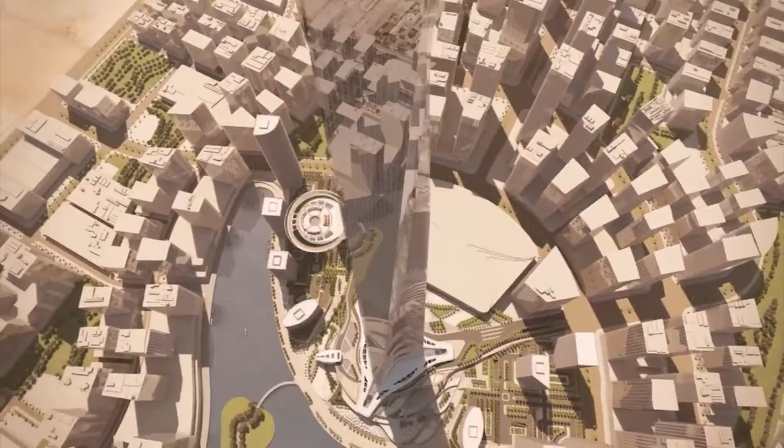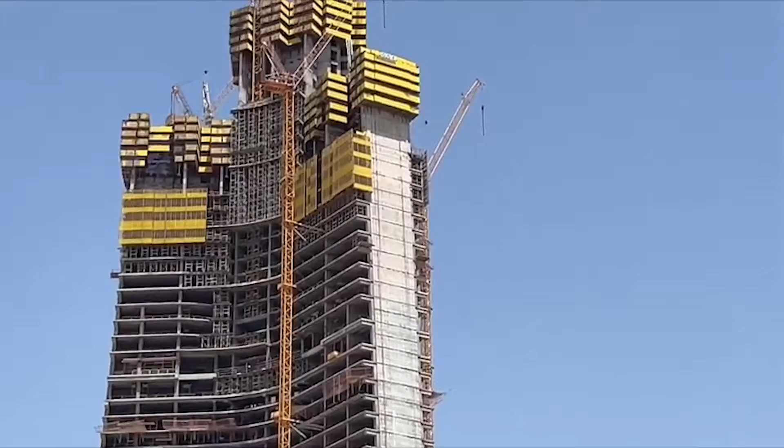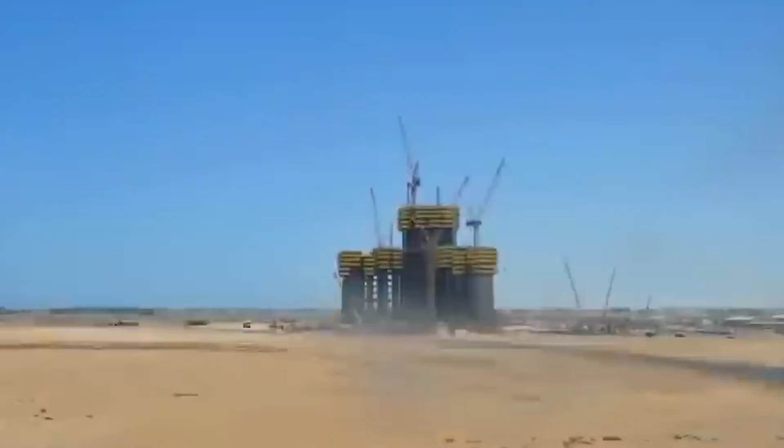Saudi Arabia's Jeddah Tower was proposed as the world's tallest structure over 10 years ago, but now it's practically a ghost town. What could have stalled such an ambitious project? Well, for starters, it takes more than a world-class architectural firm to build structures of this kind. But true to their word, the kingdom has resumed plans to transform this uncompleted building into what it's meant to be, a modern engineering marvel so tall it pierces the clouds and marks its territory on Saudi Arabia's skyline. Construction is set to resume on this historic site once again, and we are about to find out the latest updates.

But before we get into that, a little background on the Jeddah Tower. The story of the Jeddah Tower began in the mid-2000s.

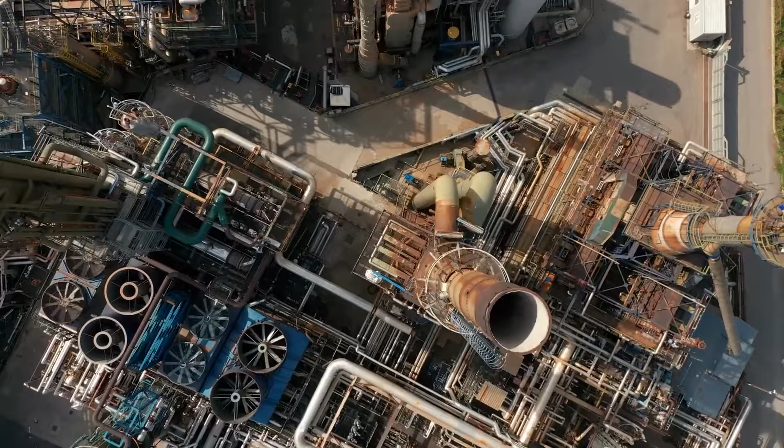This was a time when the economy of Middle Eastern countries like Saudi Arabia was booming. Oil prices were at an all-time high, and since Saudi Arabia is one of the largest producers and exporters of oil in the world, its GDP was getting really good. So they decided it was time to diversify their economy and began investing the money they made from oil into grand architectural projects. The Jeddah Tower, originally known as Kingdom Tower, was envisioned as the centerpiece of this new economic era, not just for Jeddah, but for the entire kingdom.

The idea was first proposed by Prince Al-Walid bin Talal, chairman of Kingdom Holding Company, and designed by American architect Adrian Smith, who also designed the Burj Khalifa in Dubai. The prince wanted a structure that would announce Jeddah's global status as a business, commercial, educational, medical, and entertainment hub.

So they aimed for something that has never been done: the construction of a building that will be over 3,280 feet, or 1,000 meters long. For context, Dubai's Burj Khalifa is 2,700 feet, or 828 meters. So Jeddah could break that record if completed.

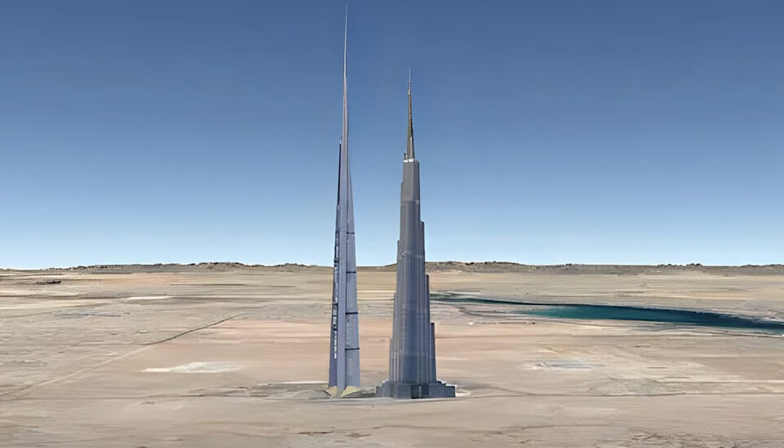The Jeddah project was officially announced in 2011, with construction beginning in 2013. But despite a promising start, plans were halted in 2018 when its primary contractor, the Bin Laden Group, was removed following the arrest of its president Bakr bin Laden as part of an anti-corruption purge initiated by Saudi Crown Prince Mohammed bin Salman. Then COVID came, and all plans were put on hold.

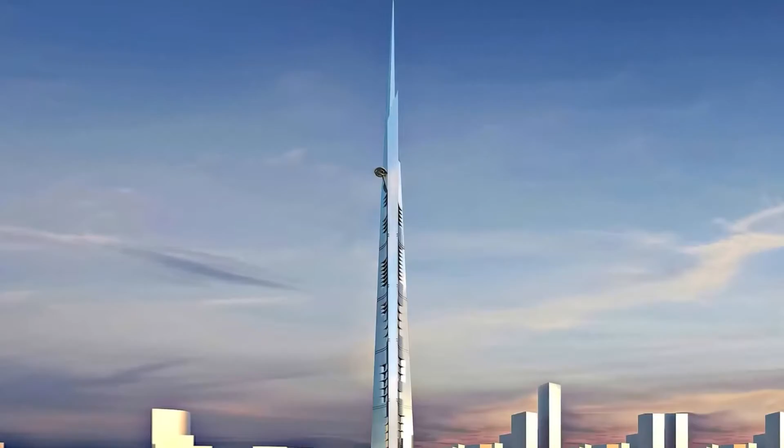The last thing we heard about Jeddah Tower was that the foundation had been laid and that a quarter of the original 1,000 meters had been completed. So let's see what's new.

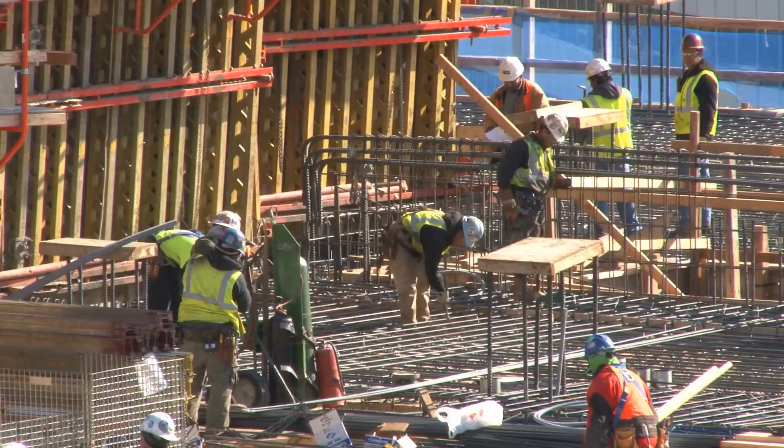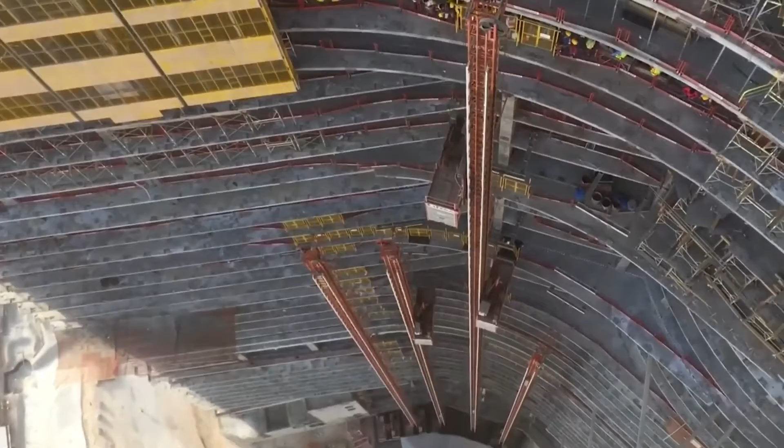Plans to restart the construction of the Jeddah Tower first hit the news in autumn 2023. With this, the Jeddah Economic Company went on a fresh hiring spree to gather the required workforce. This time, they called 14 different contractors, both local and international, to bid for the contract to complete the record-breaking structure. Each contractor was given a 3-month window to prepare their bids, with an expectation to form joint ventures that blend local knowledge with international experience.

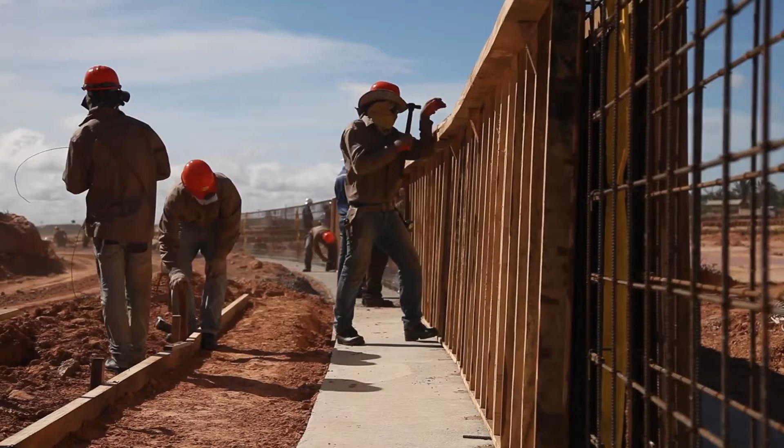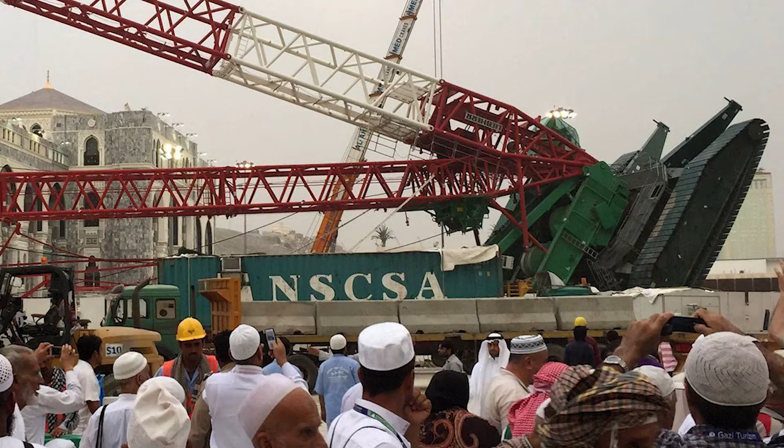Since then, the site has seen a new light, with contractors visiting to assess the task ahead. Although Saudi Bin Laden Group, the project's original contractor, has been replaced due to previous financial and operational challenges, the consulting team remains unchanged. The American company, Adrian Smith and Gordon Gill Architecture, will be in charge of the architectural vision, while Dar al-Handasa from Lebanon will provide the engineering expertise.

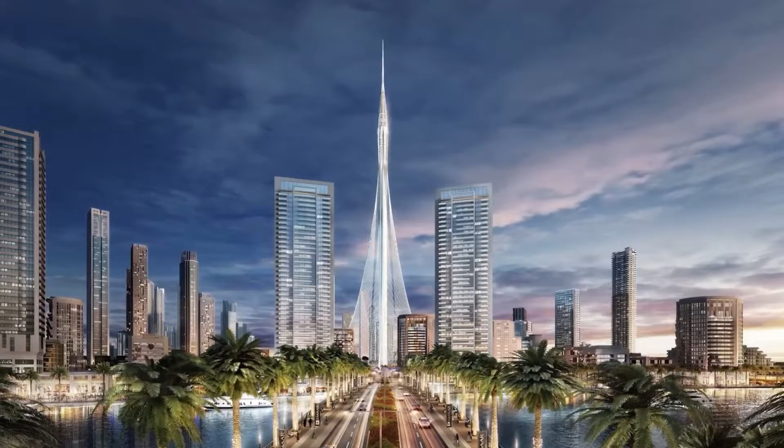Interestingly, Saudi Arabia is making no changes to the original plan for Jeddah Tower. The Jeddah Tower is designed to be much more than just the world's tallest building. Its creation is part of a bigger plan, which is Saudi Arabia's 2030 vision, a plan that will reduce the kingdom's dependence on oil, diversify its economy, and develop public sectors like health, education, and infrastructure.

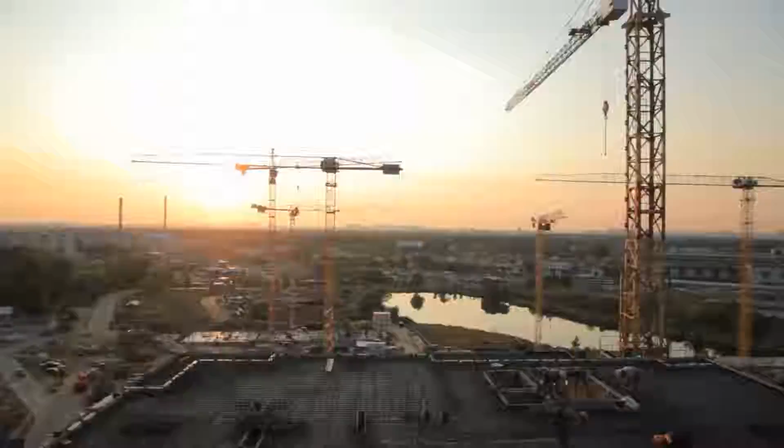Saudi Arabia is currently on the brink of a real estate bubble driven by a growing population and a limited housing supply. This situation is pushing demand and prices higher, and will also create the need for high-end luxury units like those planned for the Jeddah Tower.

The centerpiece of the development, Jeddah Tower, is primarily designed to accommodate a Four Seasons hotel, short rental apartments by Four Seasons, Class A office spaces, and luxury condominiums. It will also feature the world's highest observation deck.

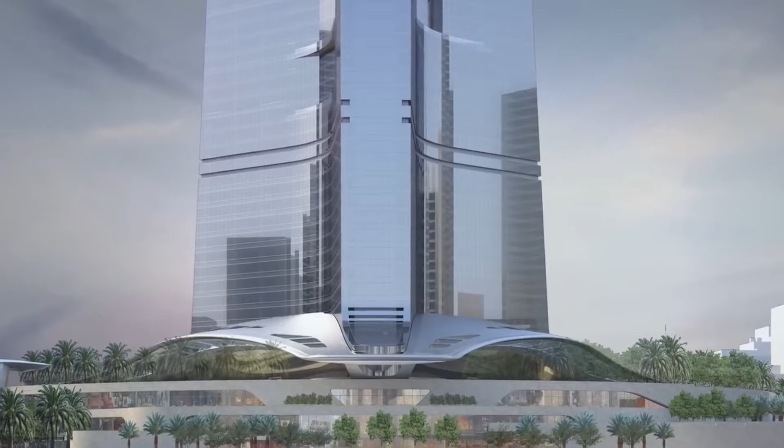Positioned on a nearly isolated plot within Jeddah Economic City, the location was chosen due to the unavailability of similarly sized land tracts nearer to Jeddah's current urban center. The area to the north is expected to be the future direction of urban expansion for the city.

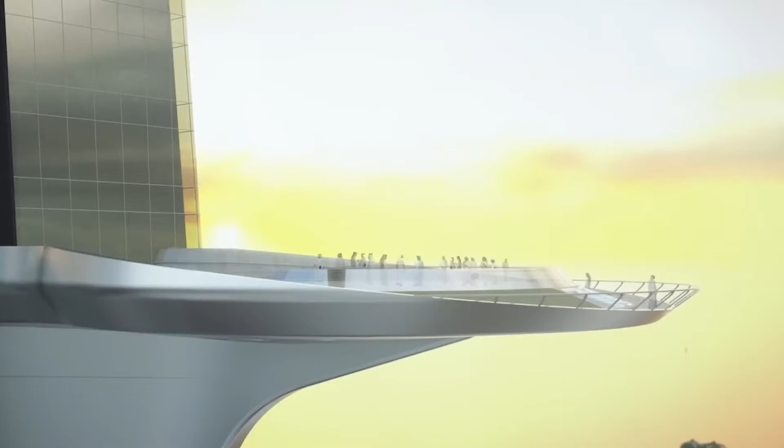Another reason for this project is tourism. With its record-breaking height, the tower is set to offer observation decks with unmatched views of the surrounding region, luxury accommodations, and world-class amenities, all of which are expected to draw visitors from around the globe.

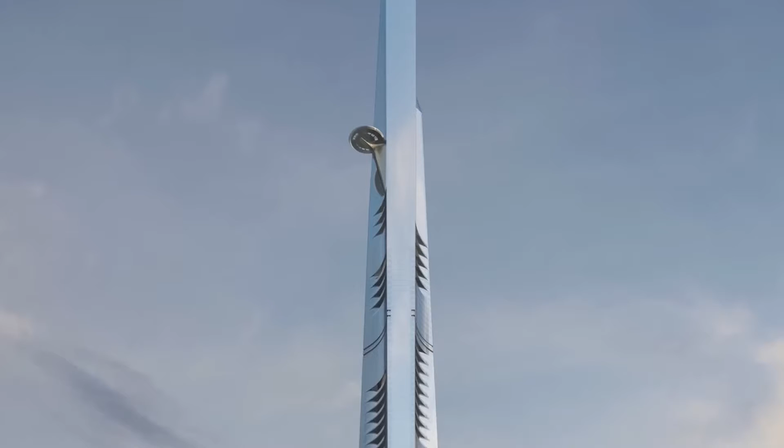Aside from these lofty visions, the Jeddah Tower is also meant to be a showcase of cutting-edge architectural and engineering techniques, something Saudi Arabia isn't famous for. The structure is inspired by the shape of a desert plant and the way the fronds sprout upward from the ground as a single form, then start separating from each other at the top, symbolizing new growth. Each of Jeddah Tower's 3 sides features a series of notches that create pockets of shadow that shield areas of the building from the sun and provide outdoor terraces with stunning views of Jeddah and the Red Sea.

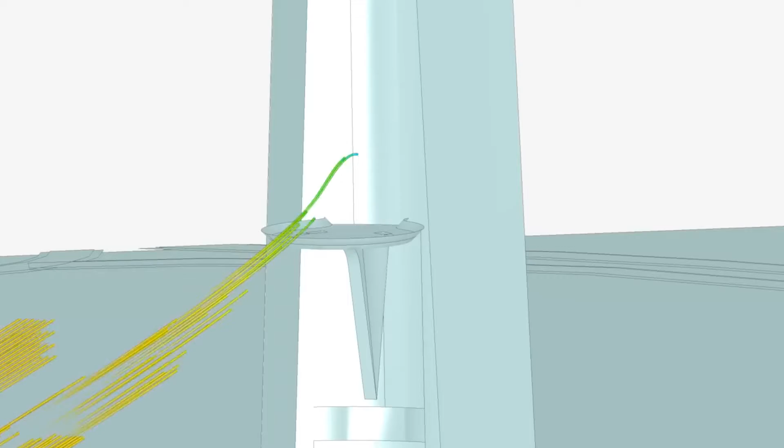Since the structure will be very tall, there's a need to reduce structural loading due to wind forces. Typically, when wind wraps around the leeward side of a building, filling the low-pressure area from both sides, it can form tornado-like vortices. These vortices, varying in pressure, direction, and velocity, can cause the building to sway from side to side. This is what inspired the sleek, streamlined form which tapers as it rises.

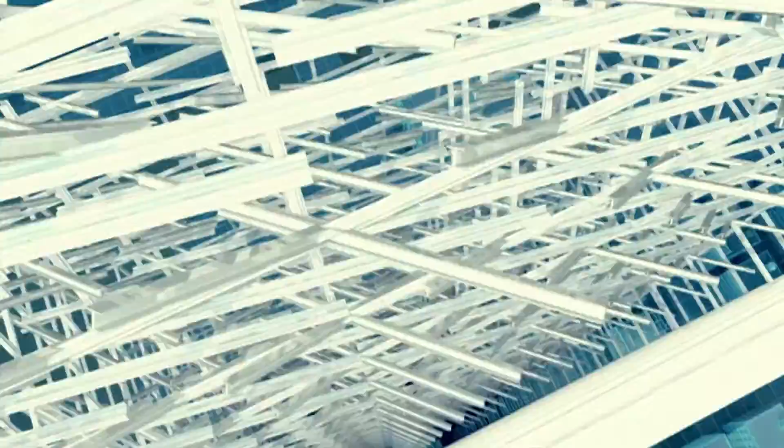The dynamic facade of the Jeddah Tower is designed to counteract this effect. It achieves an infinite timing differential in how air pressure is applied in any one direction. This innovative approach ensures that no large areas of extreme pressure or vacuum exist at any time, enhancing the building's stability. The tapering also gives the tower a unique, elegant profile against the skyline.

The walls are made with the buttressed core design. It's a structural system for high buildings consisting of a hexagonal core reinforced by 3 buttresses that form a Y shape. This configuration provides increased stability and support, essential for such a skyscraper aiming to be one of the tallest buildings in the world.

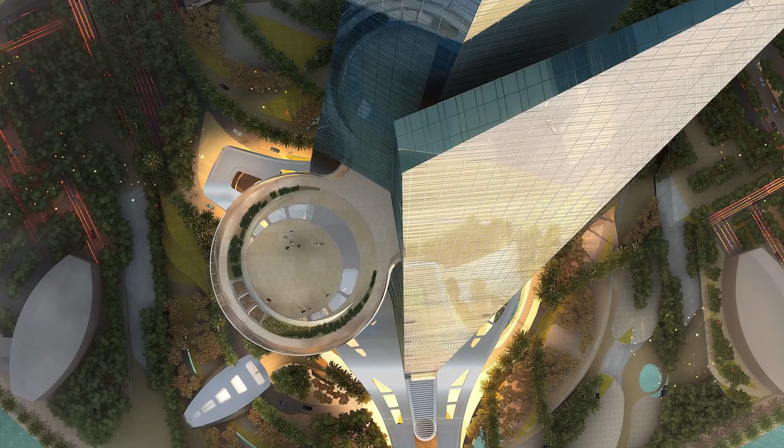The core is made of high-strength concrete and houses the elevators, stairwells, and mechanical services of the building. The Y-shaped formation serves as the main load-bearing element and helps counteract the wind forces and seismic pressures that such a tall structure must withstand.

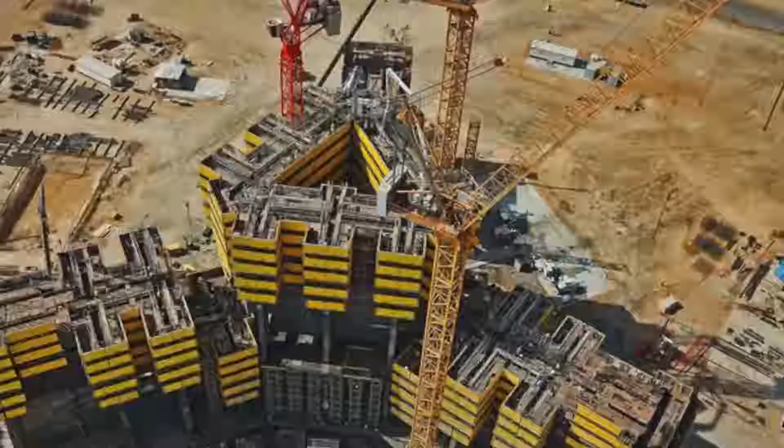Each of the 3 wings is separated by 120 degrees, resulting in a structure that expands at the base, but doesn't increase along with the depth of the lease span. This way, the structure maintains a practical height-to-width ratio of ten to one, without having a large amount of unusable, deep internal space.

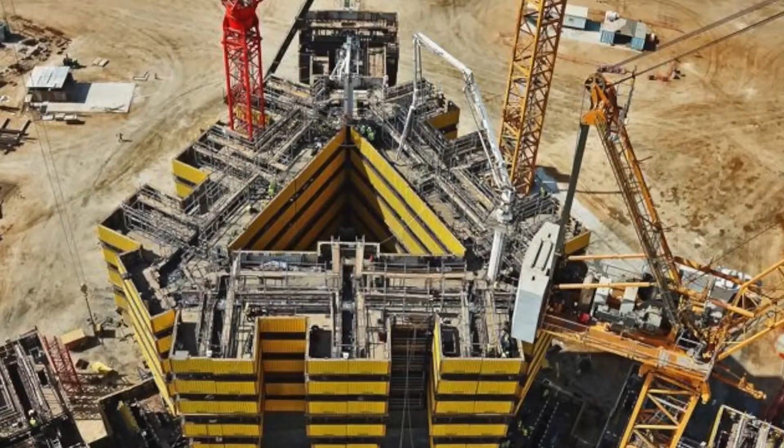Unlike the steel frameworks typical of 20th century skyscrapers, the Jeddah Tower uses a load-bearing system made of thick concrete walls. This design lends exceptional stability to the slender structure by transferring both vertical and lateral loads directly to the ground through walls rather than columns.

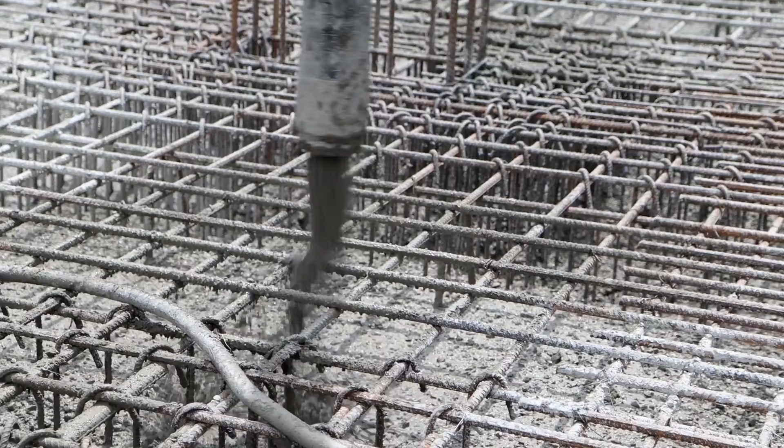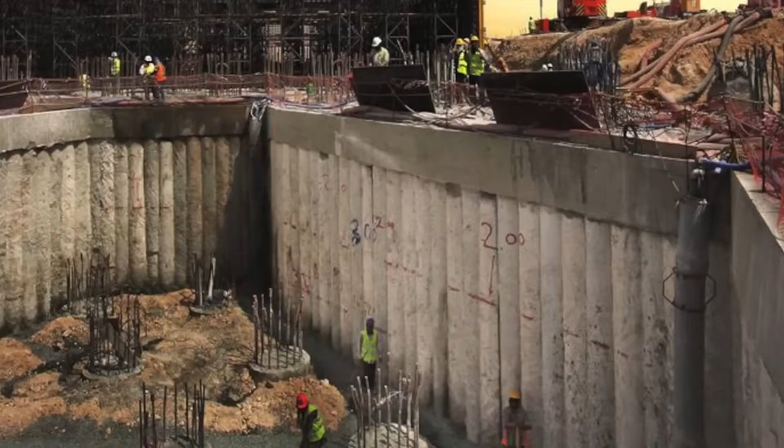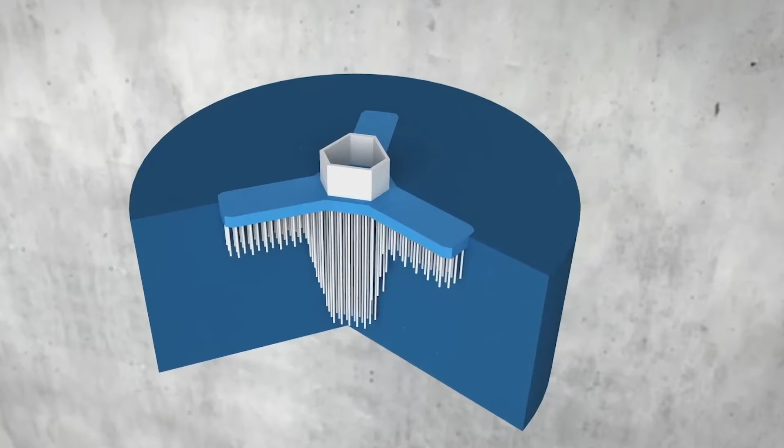The tower's huge core is made from liquid concrete, which is poured and cured within a continuously rising jump-form mold. Various structural systems, including core and outrigger, megaframe, tube, or diagrid, support the exterior facade. These systems use prefabricated perimeter columns made from reinforced concrete, steel, or a composite material, all aimed at enhancing the building's strength and durability.

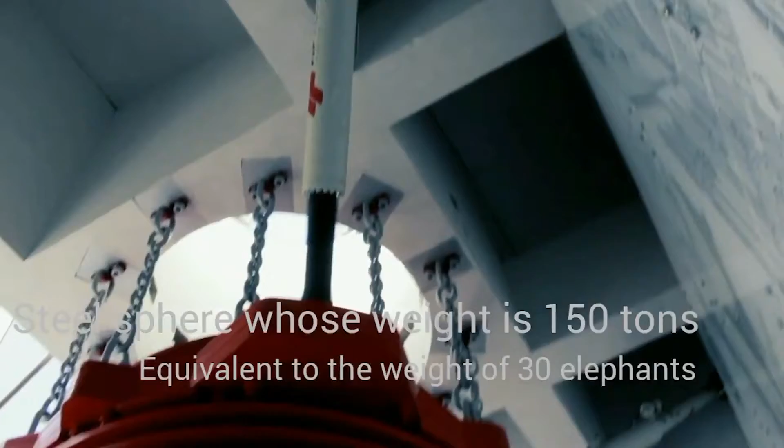Inside the spire, there are tuned mass dampers installed. These dampers provide additional lateral stability, allowing the structure to withstand wind forces and vibrations, ensuring it remains safe and secure.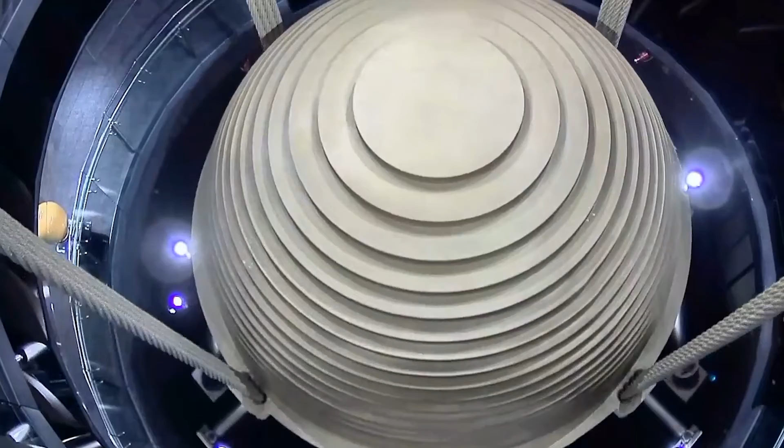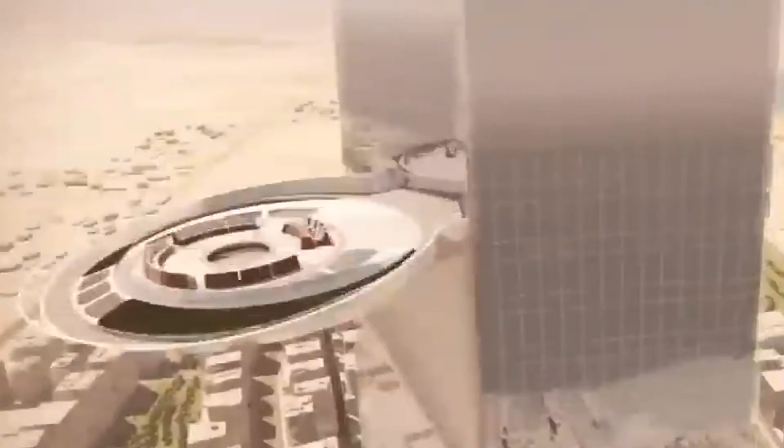Even in challenging conditions. Initially, the plan for Jeddah Tower included a helipad, but this was replaced with an observation deck due to concerns over the aerodynamics of helicopter landings at such altitude, where strong winds and reduced air density pose operational challenges. This change not only resolves the safety issues associated with helicopter landings, but also offers a unique attraction to the building. The observation deck is strategically placed at floor level 157, approximately 638 meters above ground, providing visitors with breathtaking panoramic views stretching far beyond the immediate landscape.

It's going to be the tallest in the world, so if you ever get on this platform, you'll see Saudi Arabia in a way most people have only dreamed of.

Given its height, Jeddah Tower will have one of the world's most sophisticated elevator systems. It will contain 59 elevators, including 54 single-deck and 5 double-deck elevators, along with 12 escalators. Elevators serving the observatory will travel at 10 meters per second in both directions. To address elevator challenges, the elevators will be complemented by 3 sky lobbies, allowing transfers between elevators that serve specific areas and ensuring no single elevator is overloaded with demand.

For those arriving by vehicle, the tower offers ample parking spaces, an underground parking garage for 4,700 cars that will be located near, but not under the tower, to prevent terrorism.

In terms of amenities, the Jeddah Tower will include luxurious residential apartments, cutting-edge office spaces, and commercial areas. It also boasts recreational facilities like gyms, pools, and spas alongside high-end restaurants and retail spaces. Each amenity is created to enhance the living and working experience within the tower, blending comfort with convenience to meet the high standards expected of a world-class skyscraper.

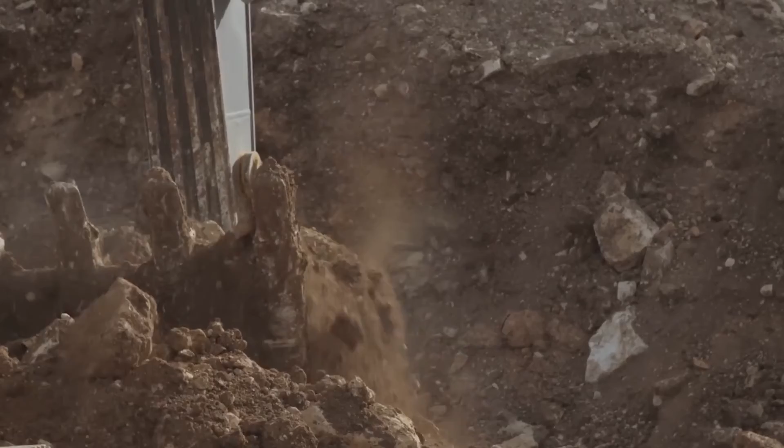All of these will be held by the foundation. The selected foundation includes a combination of piles and a raft. This combination helps distribute the building's weight evenly and handles the pressures from the earth and the building itself.

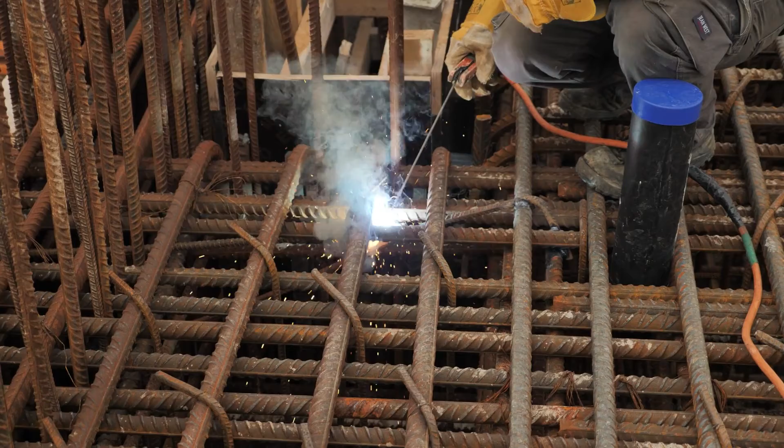The steel bars within the foundation piles are treated to prevent rust, which extends the lifespan of the materials. Special attention is given to the foundation's interaction with the soil to ensure it remains stiff and stable, adjusting the length of the piles in different areas to support the structure better and prevent uneven settling.

We're looking forward to everything planned for this project, and hopefully, it won't join the list of abandoned mega projects around the world.